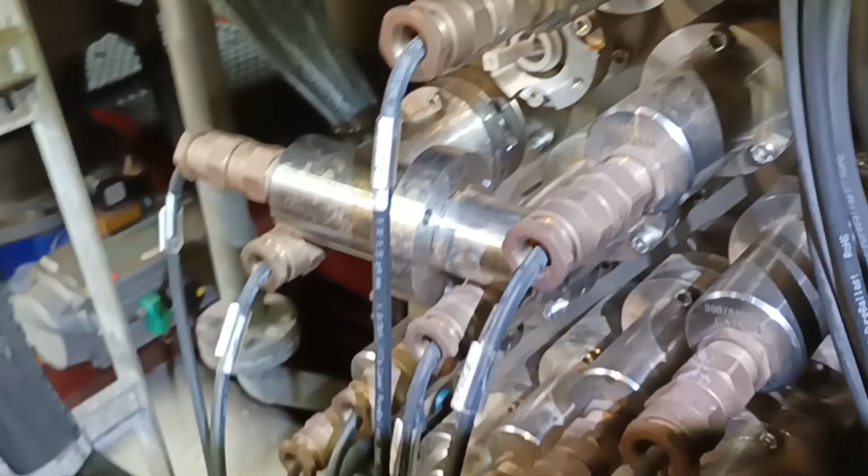Nakikita po ninyo ngayon is 16 na lagayan ng mga UV lamps. Kapag may nabusted, kailangan nating tanggalin, dili-allen key lang po yan. Pag matanggal natin, makikita nyo may cables yan. Dine-disconnect lang po natin yung cable from one end to the other end. Sa kabilang part, ganito din po ang itsura niyan sa kabilang part ng UV reactor.

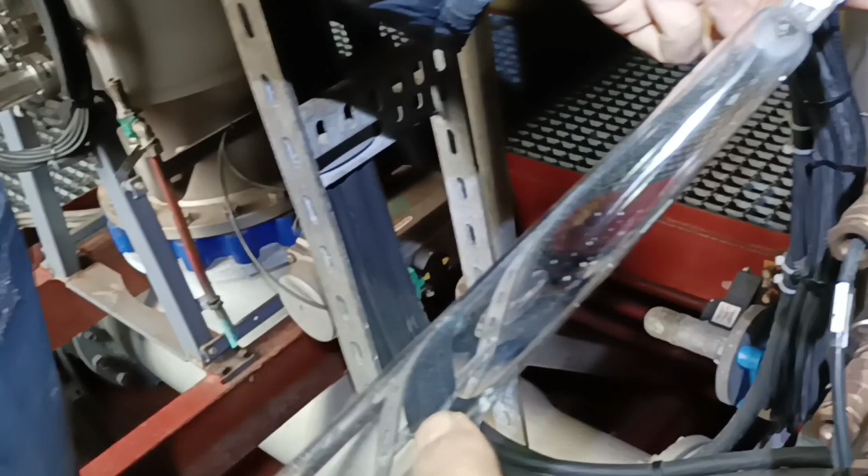Hihilahin po natin yung UV lamp from the sleeve. Pagkabilang dulo po nito is may wiring, tapos yung makikita mo is busted na talaga tong bulb na to. Parang fluorescent lamp lang po ito, pinagkaiba lang is wala siyang protective white coating dun sa kanyang bulb in order to produce a higher intensity of light.

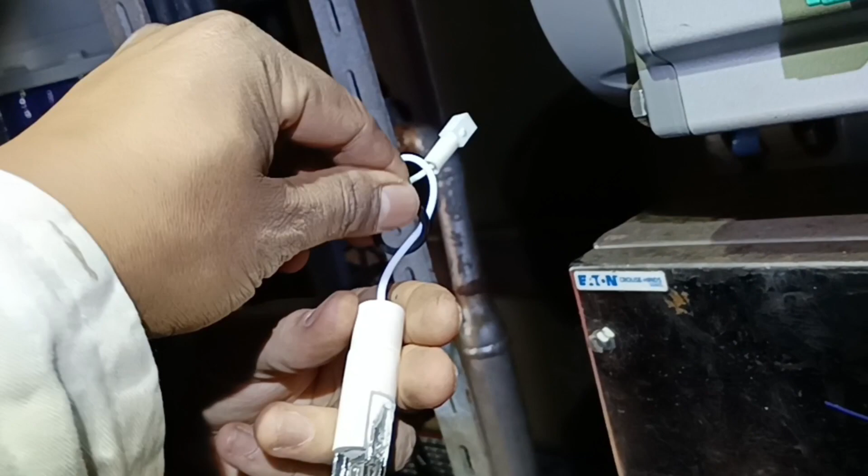Palitan din natin yung kanyang o-ring, and this o-ring is already defective, makikita nyo yan. Itong ating bagong box containing the new replacement of lamp contains also the o-ring. May dalawang o-ring po yung nakasama yan. So make sure we order only from the maker para hindi tayo magka-problema sa ating equipment.

I-install po natin ang bagong lamp na to. Pero bago po natin siya i-install, make sure punasan po natin, meron po siyang kasamang wipes actually, galing din sa box. Ayan, so that's the new lamp.

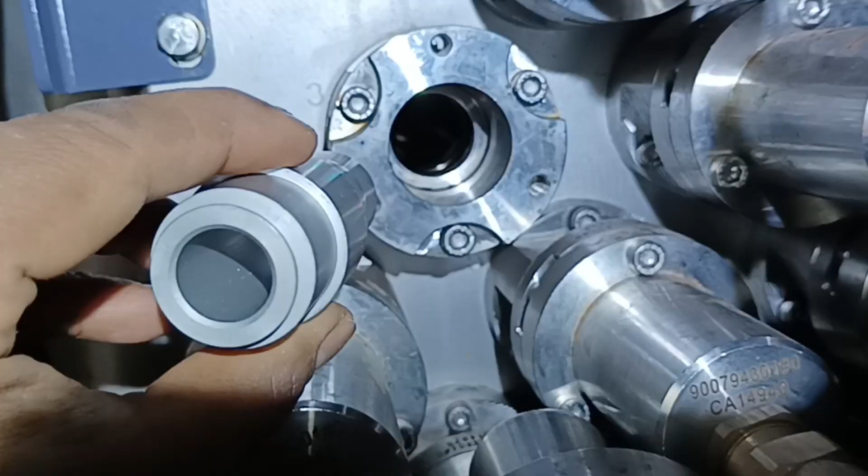Buhay na buhay pa yung kanyang mercury, and that mercury will play an important factor in order to produce a high intensity of light, in order to kill the DNA or hindi na mag-reproduce yung organisms doon sa ballast water, sa ating ballast tank.

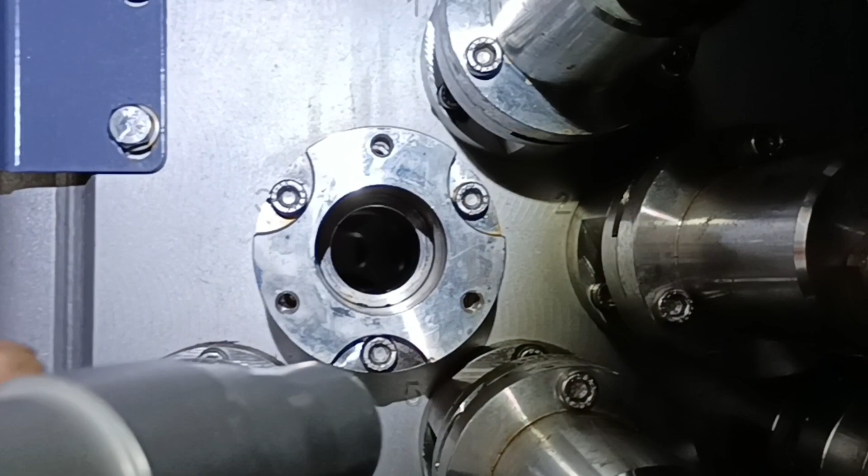Ayan, so this is the holder. Dito po natin ilalagay yung o-ring na binanggit ko kanina dyan sa holder na yan. And it's like aluminum, yung kanyang material, I'm not sure.

So the other side of this reactor, nandun po yung kasama ko, ako naman nandito. Kung ano yung nakikita nyo dito, ganun din ang nakikita dun sa kabila. Isusuot lamang po yung lamp from the other side. Kahit naman magkabaliktaran yan, walang problema kasi parehas lang ang mukha niyan.

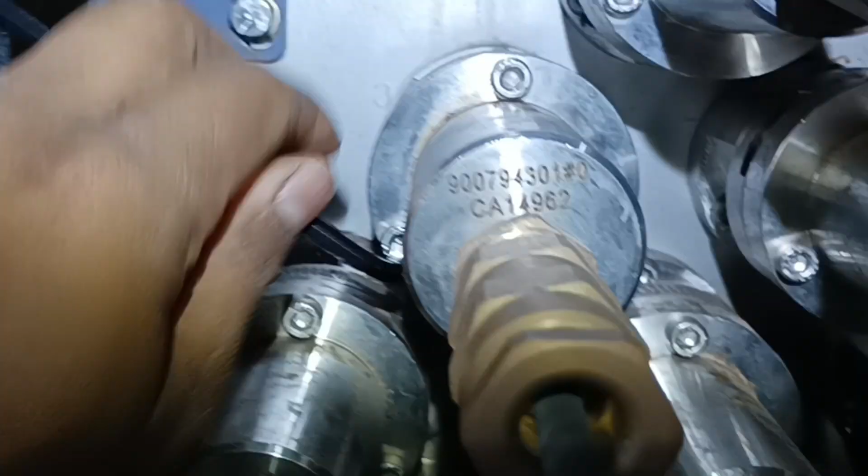Nandito na yung kabilang dulo and ipapasok natin dito sa kanyang holder with the o-ring na sealing mechanism. Then yung cable na yan, it's only parang ipaplug mo lang siya. Madali lang isalpak yun, dito sa main wire, dito sa mga black wire na yan. So once na-connect na lahat from both ends, make sure you tighten yung kanyang allen key, yung kanyang securing bolts, kumbaga.

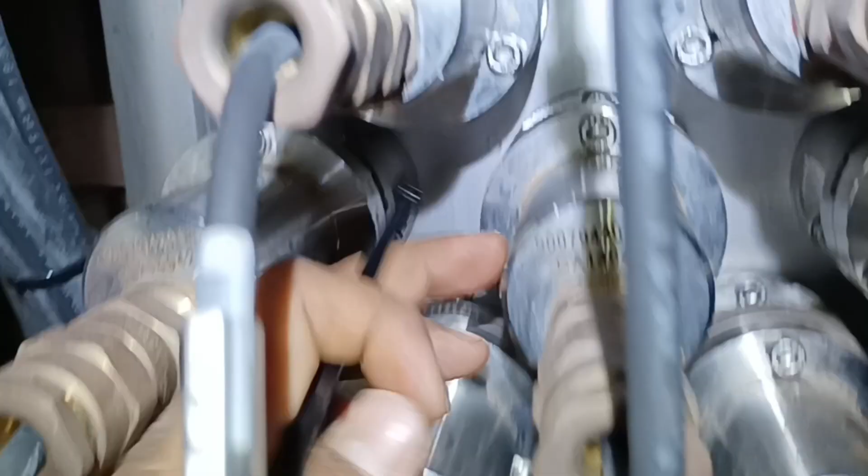Ayan, so it's 16 pieces na pinagsama-samang intensity na lakas ng UV light, and that can cause to prevent the reproduction of the organisms in the ballast water. Ayan, so tighten lang po natin.

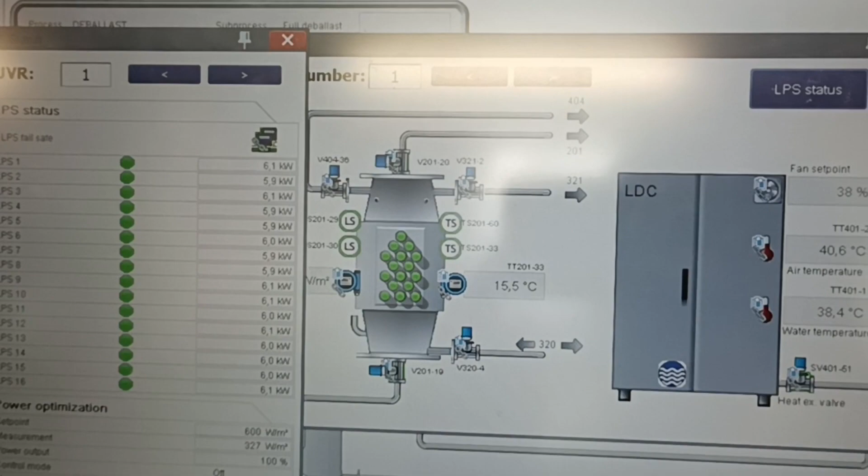And after the changing of UV lamps, i-power on natin yung system and make sure we test the system kung ang parameters ba ng mga UV lamps na to is showing the factory made yung kanyang kilowatt. Kumbaga sa amin, we're using 6 kilowatt each lamp, so dapat ma-maintain niya o ma-establish niya yung ganong klase ng lakas ng kanyang ilaw.

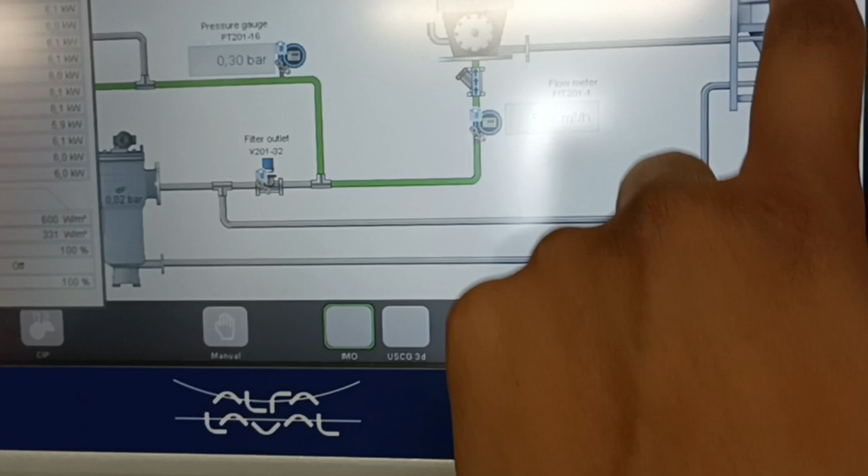Okay po, at nakita ko naman stable yung kanyang kilowatt, and ganun lang po ang pagpapalit ng UV lamps ng isang Alfa Laval maker para sa ballast water treatment system natin. Thank you!